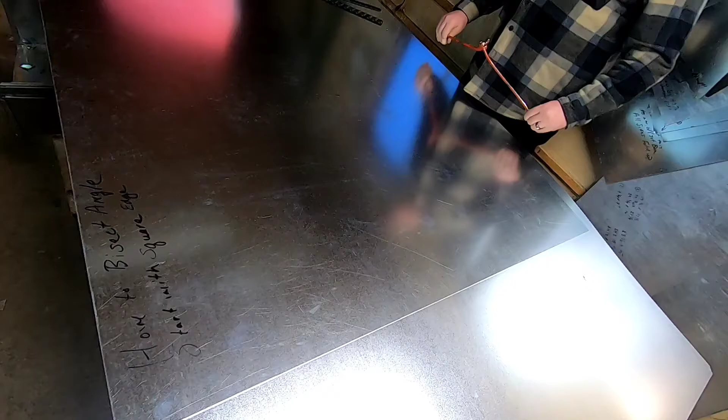We're going to talk about how to bisect an angle. When you're bisecting an angle, you're going to have an angle first to bisect.

So I measured 25.5 inches over and 25.5 inches over. That's a 90-degree angle right there, right? I start right here in the very, very corner of this. I make an arch all the way around. There's 90 degrees. That's 180 degrees. So right here, 180 degrees, all the way around. 90 degrees from here to here and there to there.

So you need basically 2 triangles to bisect a 90. The triangles need to have one side be the same length on each one of them. So if I go from there to there, I've got one triangle, right? And if I go from there to there, I got one triangle as well. Then if I go from my center mark through the middle of those triangles, I just bisected that 90 in half, and I made a 45.

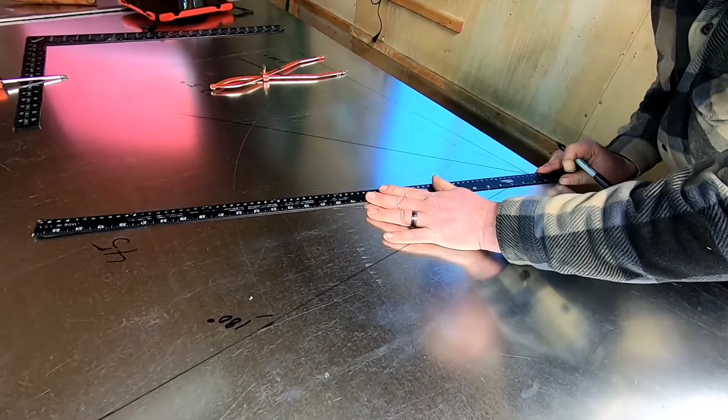Now, how do I lay out my throat and my wrap? That's pretty easy. I'm going to have to divide my 45 again in half right here. So I need 2 triangles. There's that. There's that. So that should be half right there.

So I always make, what size of throats do I make, Greg? 4-inch throats, because they run through the machine easier, right? So I'm just gonna line this up until I get my 4 there. Right there. Right there. That's it, right there. A little bit more. So now I have a 4-inch throat there. And off of this angle right here, I have a 4-inch throat there.

Then I'm going to want to write in my seams. So if I wanted to use a snap lock seam, how big would my male seam be? How much more would I add here? 1/2 inch. That's right. So on this, I can guesstimate a 1/2 inch. There's a 1/2 inch there. There's a 1/2 inch there.

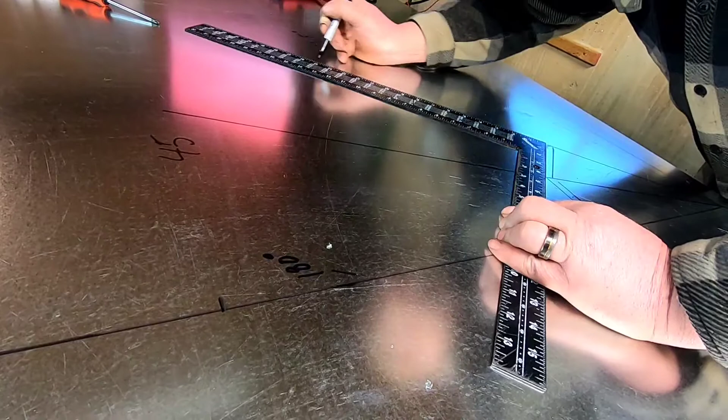Now, let's say I want this 45 to be 16 inches long. I'd go from the inside of my male seam right there, to 16 inches. And I'd go from the inside of my male seam right there. Not very straight right there, but I'd go to 16 inches. And then I'd use my square to draw that down. I'd square it up so it's nice and perfect. Draw that in. Square that up so it's nice and perfect.

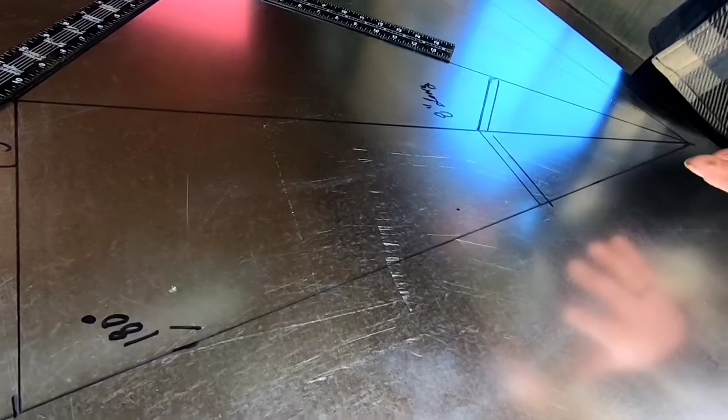Okay, so we know that my throat is going to be 8 inches long, and whatever height my duct is, plus my female seams. And on this end, I got about 10 3/4 here, and 10 3/4 there. So what is that? Total length gonna be 21 and a half. So my back wrap is going to be 21 and a half inches long and be bisected right in the middle and bent right in the middle, right?

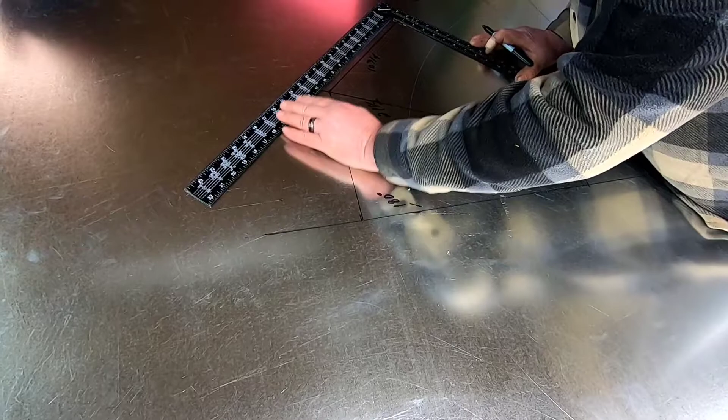Then I'm going to add for my male seam here, which I'm doing snap lock, so it's going to be approximately 1/2 inch. Over here again, same thing. I can get it right at 1/2 inch. There, that's laid out. That's a 16 inch cheek. Okay? Now, let's make the 90. So, I'm going to want to draw in 2 triangles again.

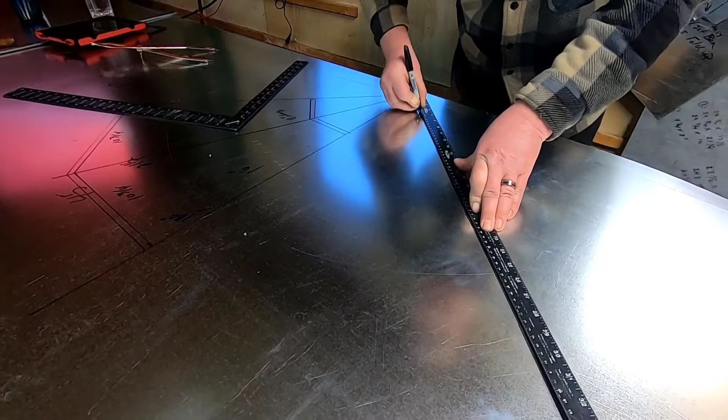The wider you are out on this, the more accurate you're going to be for the exact middle, but this is going to be close enough for duct work. So I'm going to bisect those 2 triangles, or the square that I just created right there, pretty much. So right there is the center of my 90.

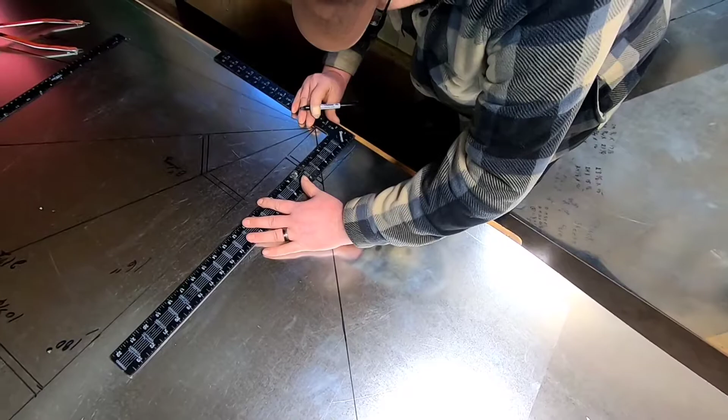Again, I'm going to want a 4-inch throat. So there it is, 4 inches plus a 1/2 inch for my seam. This should go right together here to 4 inches. So I'm going to want approximately a 1/2 inch for my seam. That one there didn't get drawn very well.

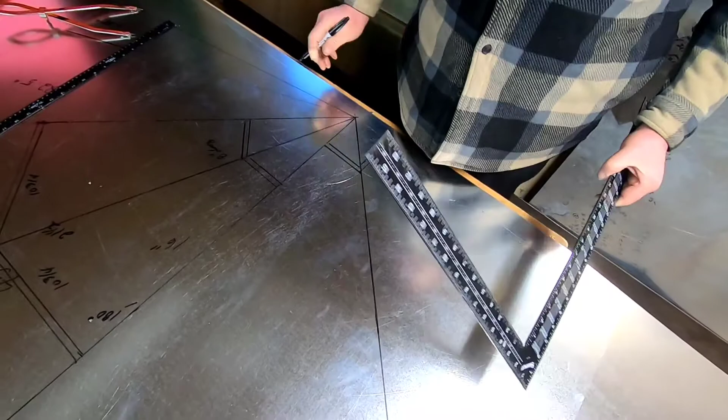Okay, so what if I want a 16-inch 90 here? So the next thing I'm going to do, put that over. Holy cow, my square's not big enough. 16 inches there. Should be.

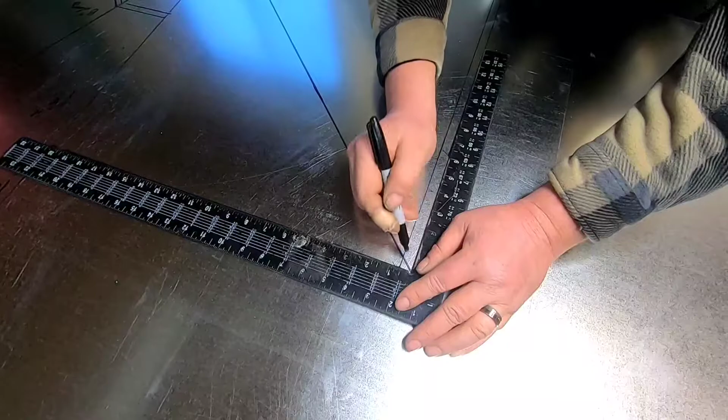Add for my mill seam. Inches over here. Oh, that's right. Add for my mill seam, 1/2 inch. I could take that 16 right there, I mean to 20 right there. Finish this guy up. Finish my mill seam. Okay, there's a 16-inch 90.

Okay, now what if I want a 22.5 degree? I'm gonna do the same thing. I'm gonna bisect this here, 22.5 degrees, with my compass by making 2 triangles.

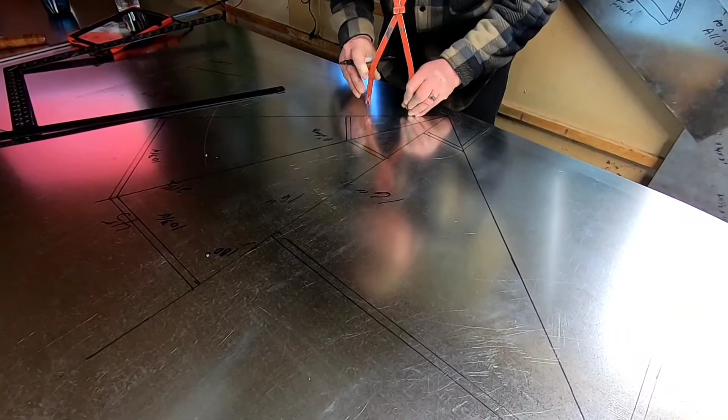The farther you get, the farther up you're going to be if you want a 4-inch throat. So, if I want 4 inches for my throat, see how far up I got to start? Clear up here. So, if you're going to make a 22.5, you're going to need a bigger sheet, a bigger sheet. We can just draw my 4-inch throat in here.

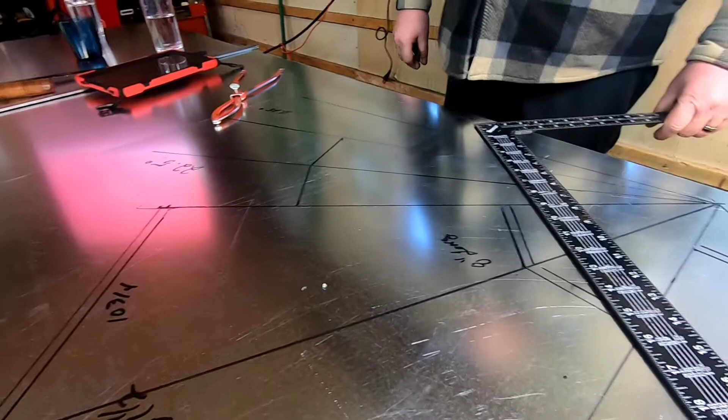Not quite 4 inches, there it is. And again over here. Then we can add for our mills, and then if we had a longer sheet of metal, we can make that, right? Then you can make an 11.25 degree. And then you can make a, whatever that is, 5 point whatever you said. Right?

Pretty basic and pretty easy though, right, isn't it? So that's how you lay out a 90, a 45, 22.5, and 11.25 on the cheeks. Is everybody good with that? See what I did? You guys get it? Okay.

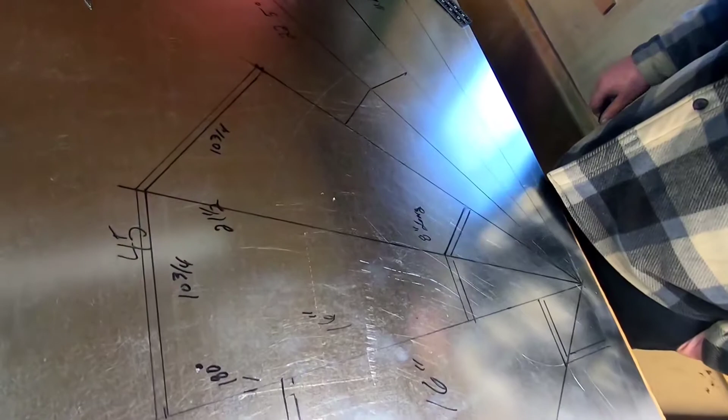What time is it? It's like 10 till. Okay, let's keep continuing on and just talk about the wraps. So this wrap here, it's going to be 20 inches. 20.

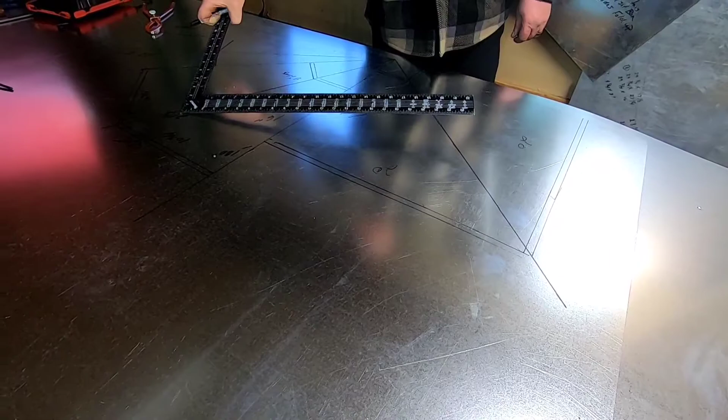This one here, 8 inches by 11 inches. And just to be awesome, let's just finish the layout of the 22.5er right here. Now you can have a 2-inch throat or a 1-inch throat on these, you just won't be able to run it through the machine. Yeah, good luck. Just make tabs, screw them together, paint them, pookie them.

Okay? So we can make this in. We can make this one 10 inches. Got 10 inches of room there. 10, 10, square. Square.

And a 1/2 inch, down here at a 1/2 inch. Here a 1/2 inch. There a 1/2 inch. Here a 1/2 inch. So that's a 10 by. And our wrap's going to be 5.5 there, 5.5 there, 11 inches.

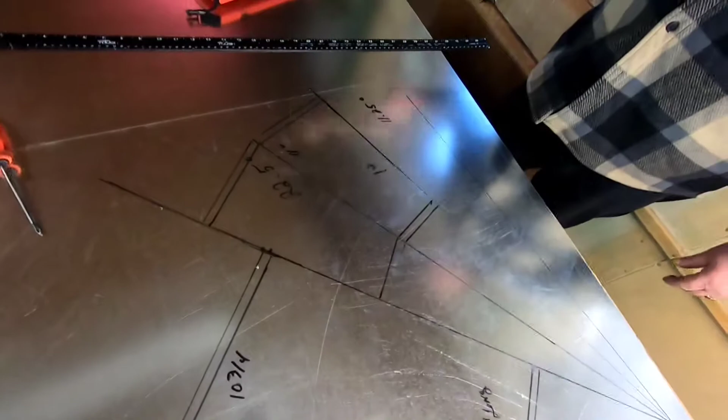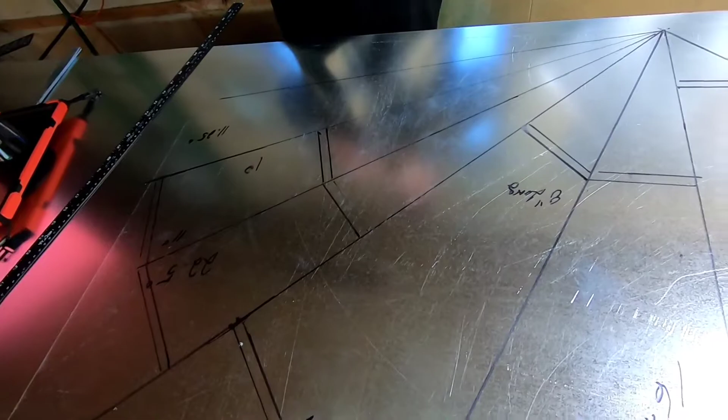I really thought this was going to take longer. It's pretty fast and easy. So, having a compass in your tools is a good thing to have. You actually need 2 compasses if you're going to lay out when we go through the next one. You're going to have 2 compasses, especially for a square round, because you're not going to want to. You're marking 2. All of this duct work that we're doing is through triangulation. Okay, so you need a compass to make triangles, and when you're doing a square round, you need 2 compasses to do a square round.